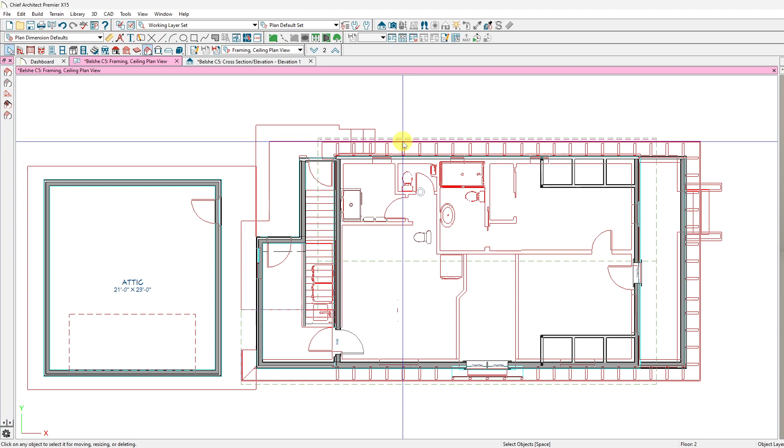There's the existing wall, and they'll put the beam in here to handle that downstairs. I'll probably show that pretty soon so you can see what it looks like. But let's turn that off. None of this stuff is placed because I don't know where we want a bathroom yet.

And down at this end of the house, I left these pieces in case we still want to go with an attic truss or bonus room truss or whatever you'd like to call it. I'll show you again what that looks like. So this is just kind of a room that's out here. It's not an open balcony.

It'd be very narrow if we brought this wall all the way down. So I just left it open rail and don't really have a purpose for it.

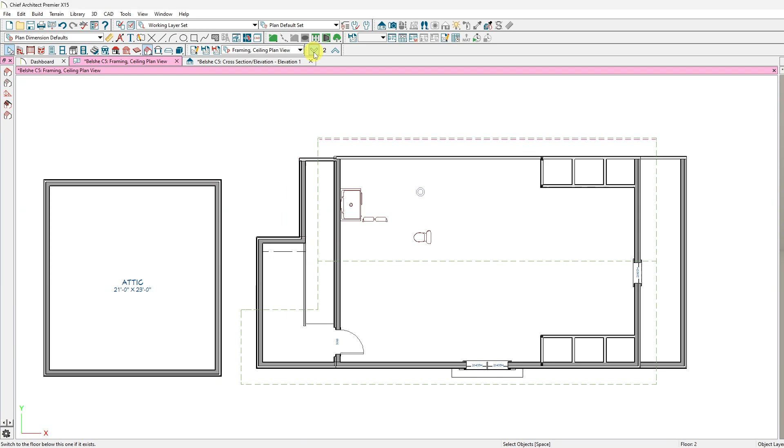We could actually pull it back, but it does help with the drainage, or the covered connection between here for your walkway. You can see that when I go downstairs, because this roof comes over, and right now I didn't have this. I pulled it back because I was working on a beam that would not connect. It wouldn't build right, so now it's actually overlapping.

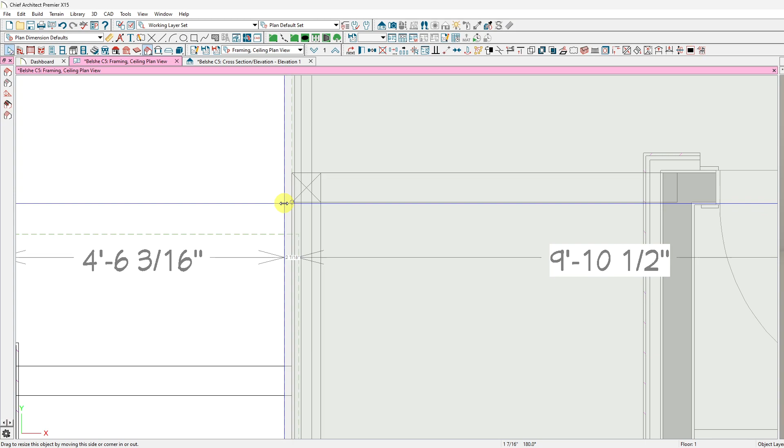Now we're covered, and we'll probably want to pull that out. Let's just pull it out 6 inches, and then we'll be able to see what that looks like from the 3D perspective. So this is the upper roof.

It does cover your whole porch area, which comes out. This is a beam there, and in this drawing I guess I don't need to see the floor beams, so I'm going to pause for a second and turn those off. Okay, so with those off, I can see it as a post. Kind of makes it a little easier to determine.

This is the steps up, and then your deck, so you can walk in downstairs into the laundry. It does show the wall crossing, but it's not - that's just the upper attic wall. Here it's clean, and you'll see it in 3D.

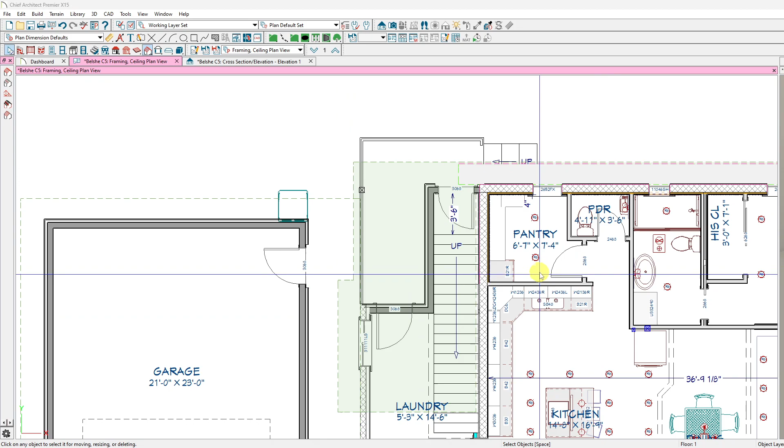So let's switch over to that 3D view. We did get that full kitchen, and as far as this stuff goes, let's just stretch it down. It's going to be kind of weird looking.

Before I do that, let's see what we had. This was 48 inches wide, so I'm actually just going to grab that. Let's grab this whole thing. I'm going to get those lights, unfortunately, and I'll get 2 stools.

We're going to copy about the center point. That'll bring us the extra chairs. Now we can just get rid of that, and get rid of... let's tab, let's see if I can get rid of just that.

And then we could center this, or however you'd like that. I would think that we'll maybe do an end cabinet, center this down, and another end cabinet down here, and put this more down towards the middle. I can't move it right now because of the cabinet configuration, but it's pretty easy to change, so I'm going to do that real quick too.

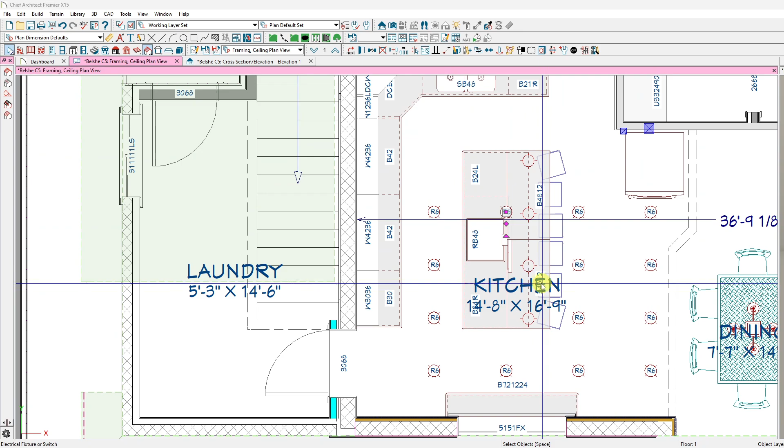So now that we have this widened out kitchen, we'll need to copy these lights down and stuff, but for right now it'll work. So this is how big that kitchen bar can be, and I think now that I've got that straightened out, we can actually go into the 3D view.

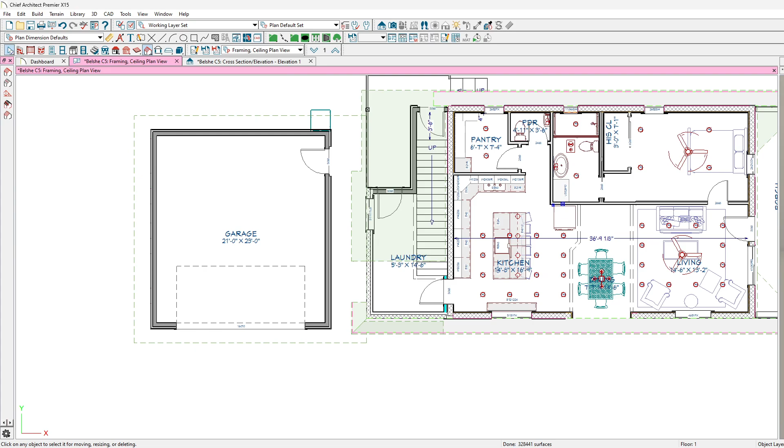But it looks like I accidentally mirrored that as well - that's just the overhang. Let's get into 3D because then I can explain some more of the things that we need to be looking at. And here we are upstairs. This is what I'm talking about, those two end pieces where the attic trusses would go.

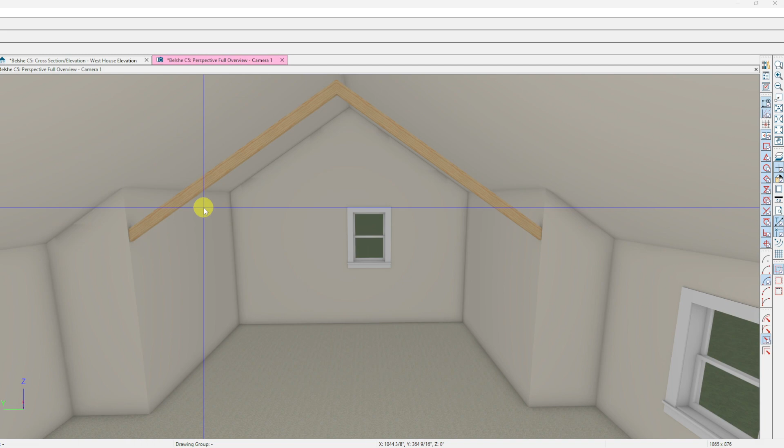In the drawings before, we discussed these would be truss members up through here, and then this would be drywall underneath. I can fake in a ceiling, or actually put in a ceiling at that point. But this is just conceptual until we decide what we want to do.

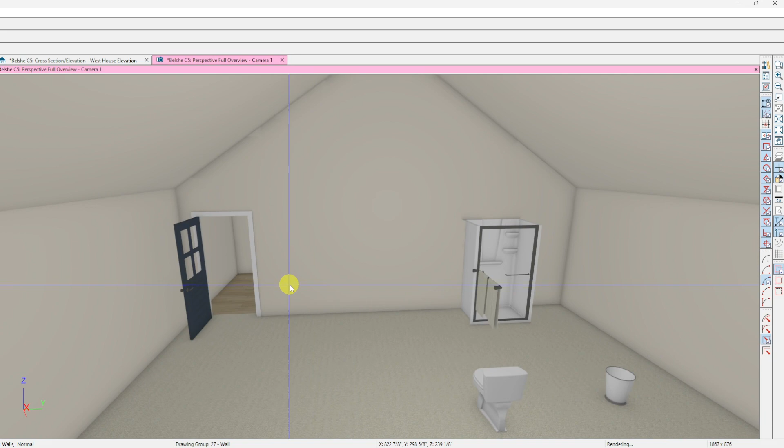Because what it allowed us to do was create this dormer. I mirrored this to the other side, but now that we moved this door down to accommodate for the stairs, I can't necessarily build these attic trusses all the way through.

So I'd have to look at how that would look, but we might be able to put support here and get you attic trusses, and then we'll coordinate the bathroom as to how you would want it to be, and then add a window to this side.

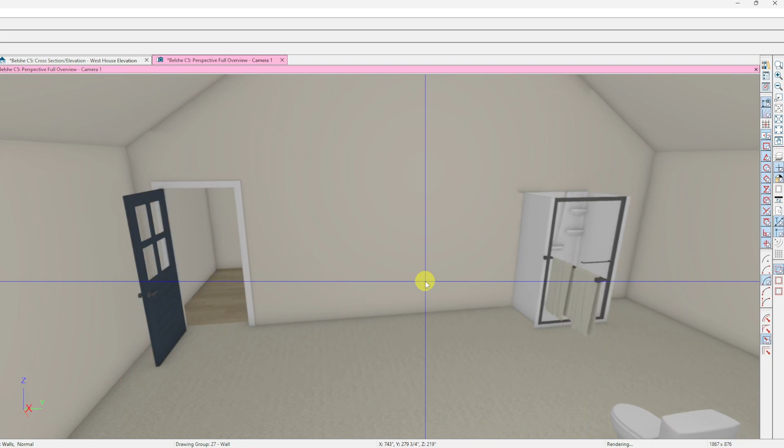So this is that big empty bonus room. We just have the components up here that we've been discussing, with the exception of we need the sink and the vanity. This is just space at the top.

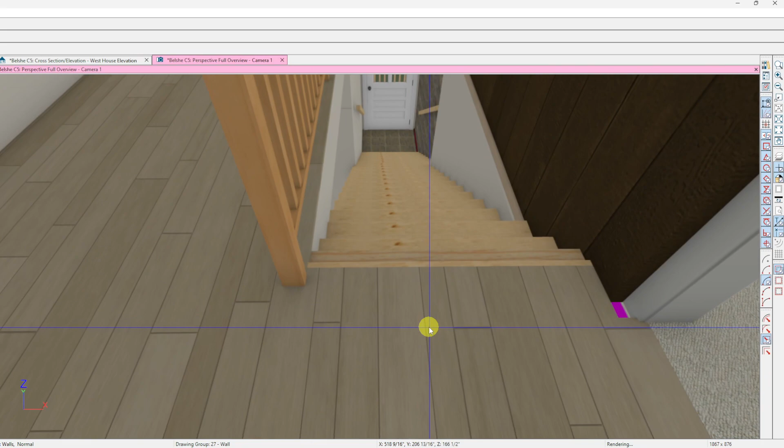What that would be used for, I'm not sure, but we are still in conceptual stage, so we've got plenty to figure out. Handrail, I'll have to get it to work through this section so you don't fall off. But until we get happy with what we're doing here, I'm not going to worry too much.

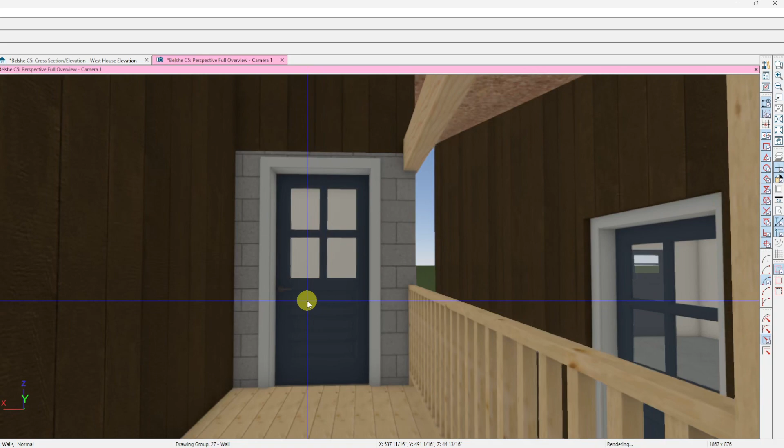So we're just going to walk down, and of course we would open the door, not walk through it. When you look around, this is your deck, and this is where we go back into the laundry room. Right now I don't have any finishes on this ceiling because we're just conceptual, so I'm not going to go to that extent to get a design down.

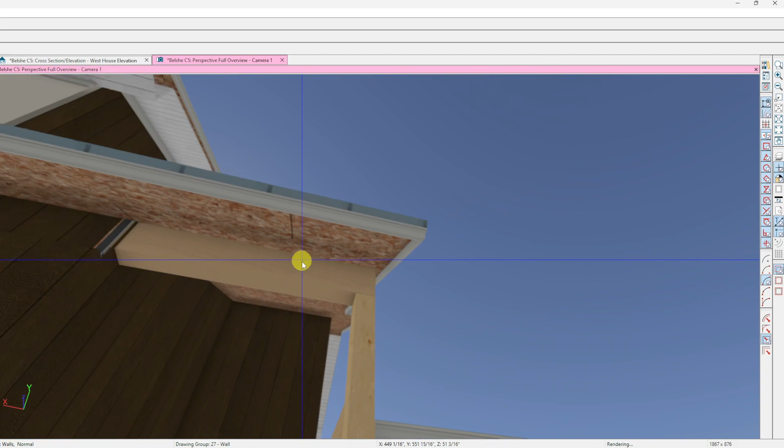What I have is a beam in your wall system coming over to this post. We'll have to hang it off that post because this post goes all the way up to carry that roof. And this roof overhang will continue out the way your house actually looks, getting these coming all the way out to the end.

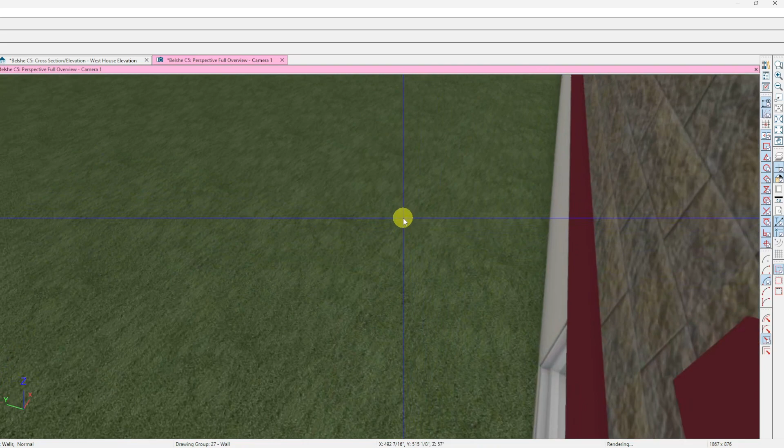Then I need to talk to you about terminations, and we'll do that here in a second. So walking down the stairs, you'd be in your backyard. We got to stay kind of tight here because you have your neighbors next door. And we have not dealt with the built-on shed to this yet, because we're mainly working on how to make this happen so that you can still get your garbage out to the alley.

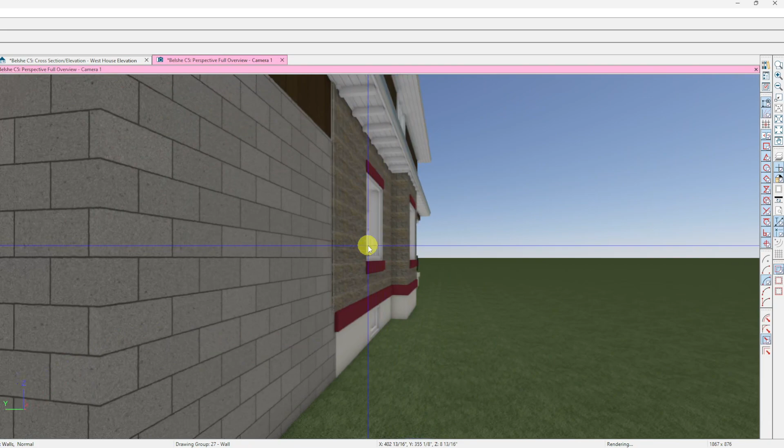When we look back at the house, what I've done is above your existing masonry wall, I've sided this, and maybe we can get the siding to cover this and make it look a little nicer. Then we have the siding here, and we did do a pretty tall shed roof to get that snow to stay away from the front of the garage.

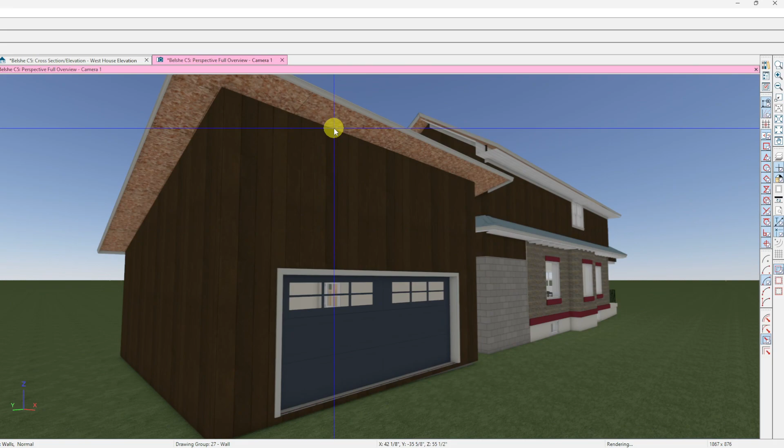And I believe this is a 312, and I really don't like going much less than a 312, and yes, it is a 312. You can see right there.

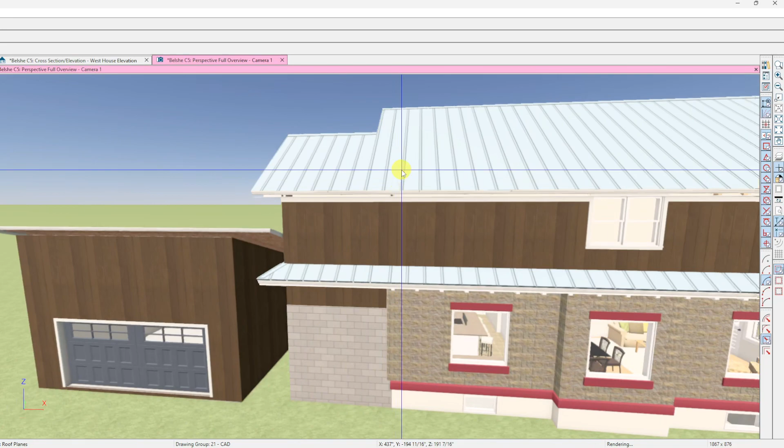Now that we're outside, you can see kind of what this roof is looking like, and we'll talk about the end treatments here in a second, because what I did is I've got your roof style, and whether or not you've got the money to put these corbels up here, they're only decorative.

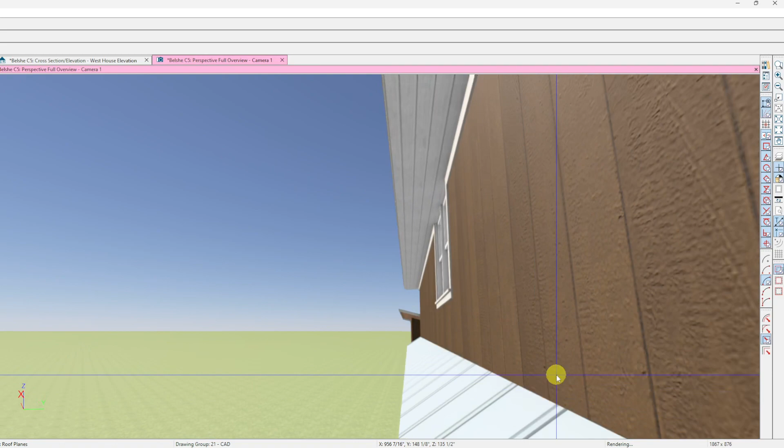Remember, they don't have any support, so they're just a bunch of 4x4s with a little chamfer on the end, and they can just be attached to the bottom of that tongue and groove to match what you have. So that becomes a budget issue.

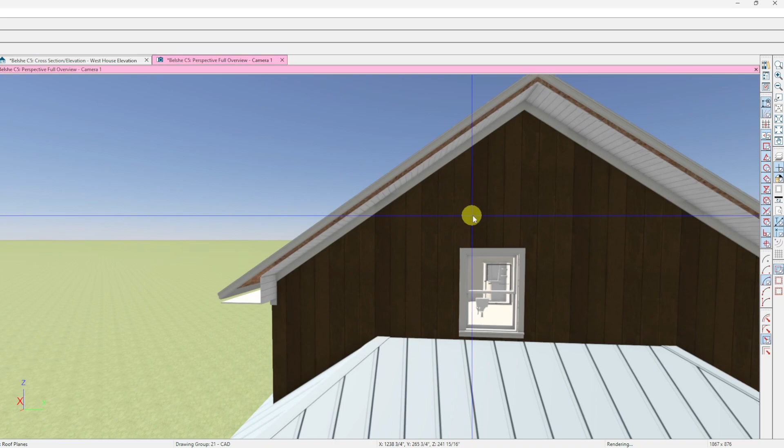And then it's how do we finish these end caps? There's a couple different things we could do. You can see down here we have a corner, but in the interest of not making this too expensive, I kept this as a full gable end.

Now, whether or not we want to take this window, I'd say yeah, let's just go ahead and center it right on the ridge, and there you go. We can make it wider too. I mean, that thing can become quite a bit wider.

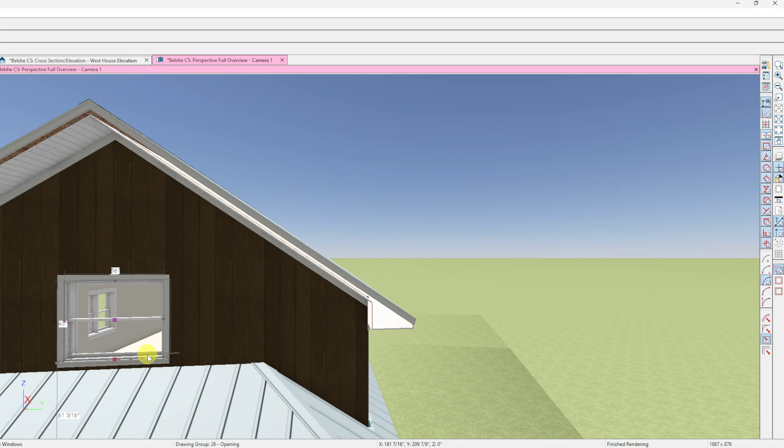So I can pull this out, and it'll probably double up if I do this. Go a foot that way, and then pull it over into position to get a nicer window in there, get some extra light.

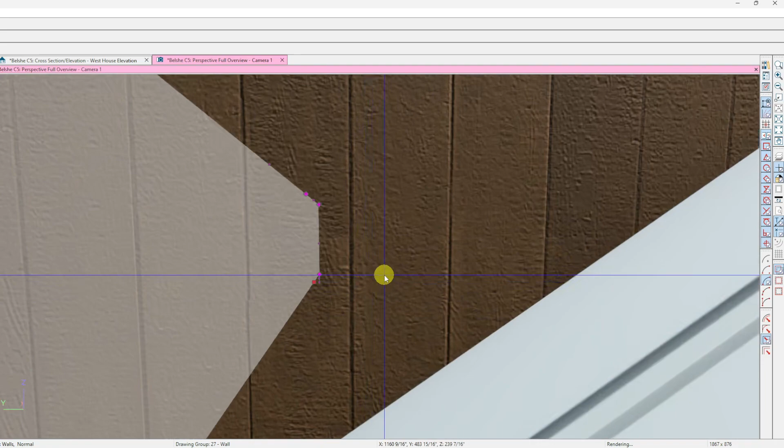And what happened here? Let's see what happens when I reverse the wall. Nope. So what's happening here is there's something about those interior walls that I put in here that's making it think these were inside walls.

So on the exterior, for now, all I'm going to do is paint it. I'll take this material, grab it, there, and that should at least make it look pretty good for right now.

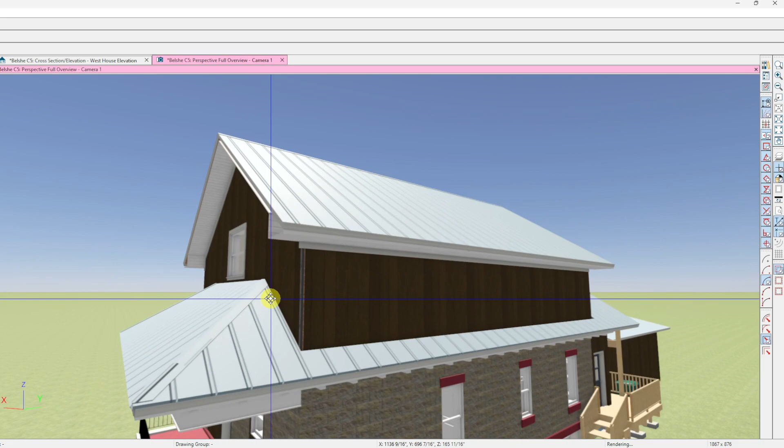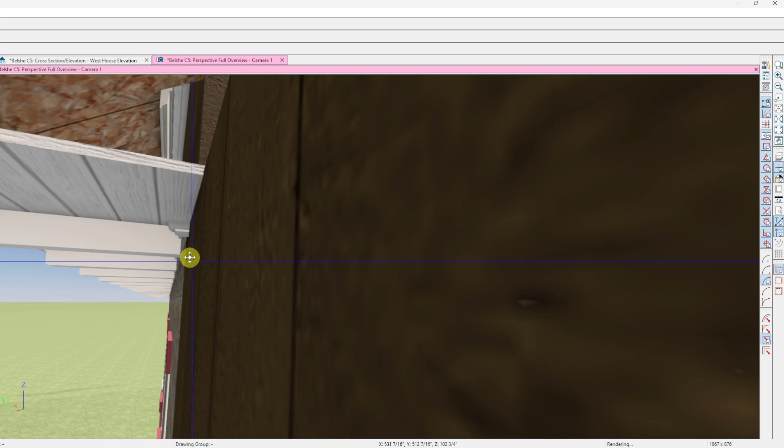This is that same trim board that we had around the house, and it may... there it is right there, and there was a piece down below it, and that probably got stripped out. I'll have to put that back, or it got moved up.

When this roof got built, sometimes Chief likes to try and figure things out that I'm not sure what happened. Oh, there, look at that. I got it backwards. That's why I can't move that in close enough. I keep wondering why I can't move that in. So sometimes these tours help me.

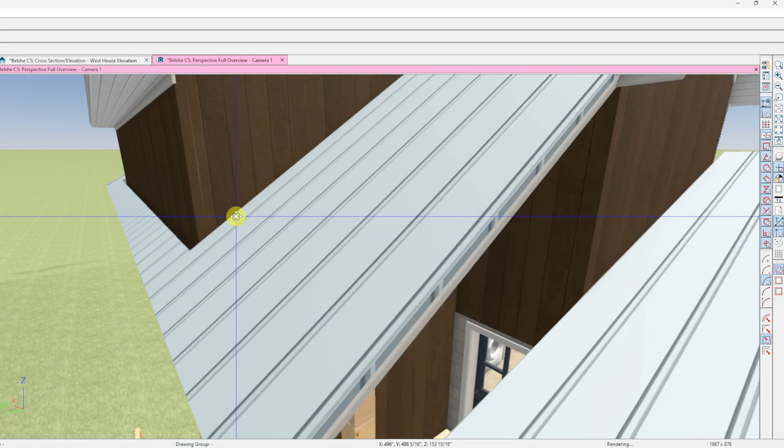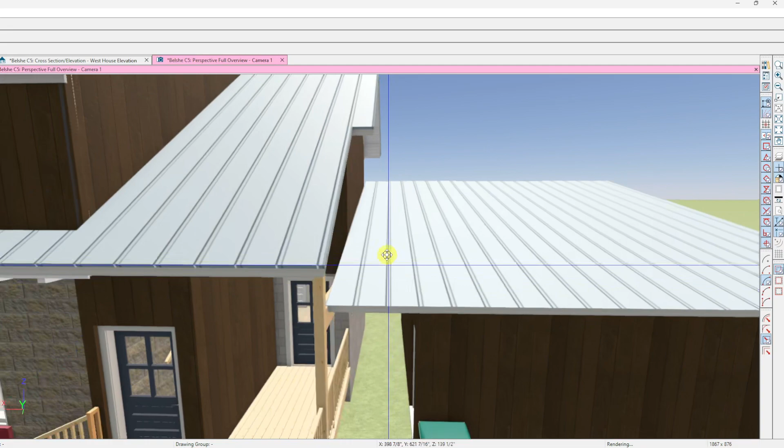So the roof here, it's a standard 2-foot overhang everywhere. This comes out 2 feet, then away from the wall 2 feet, and then returns. It's just enough so that we're getting an overlap here, which with blowing, drifting snow, we're still going to get some in there, but for the most part it'll keep this clear.

And that is what we're looking at. So just looking for some feedback, and we'll discuss how these returns work. We can return there. This return we have here, we can do a return here to match. We can also work on doing a corner that's kind of like a 45, and I'll get you a picture or something like that so you can see it.